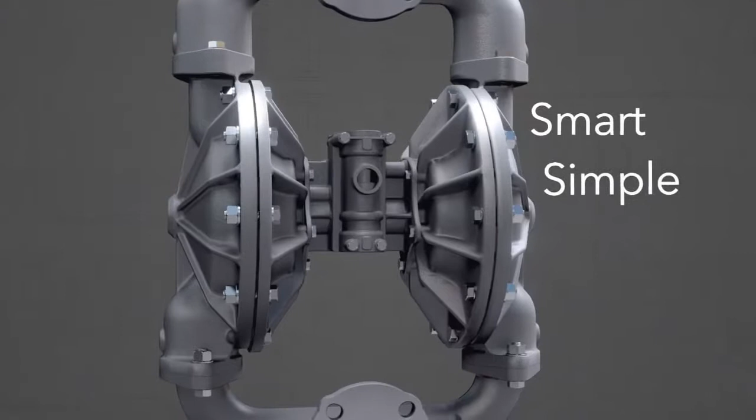Say hello to the All-Flo A200, the most energy-efficient 2-inch air-operated diaphragm pump in the world. With a smart, simple design perfected during years of intensive research, the A200 combines rugged reliability and ease of maintenance to deliver the best performance on the market today.

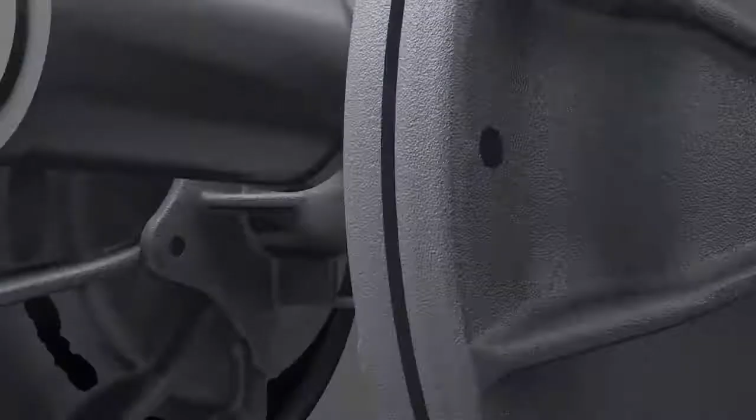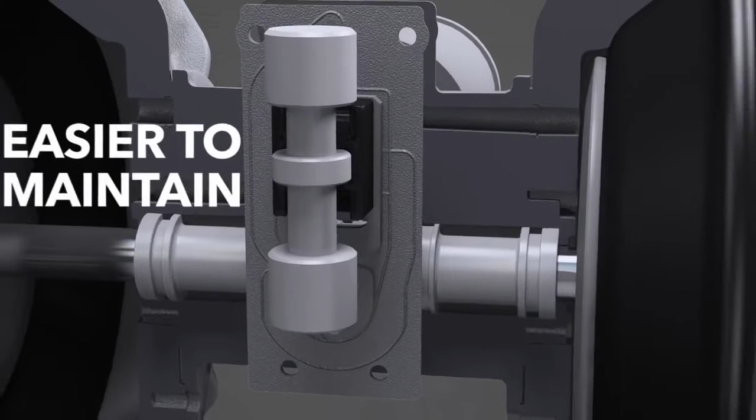The A200 is engineered to outperform the competition while using the fewest number of air valve parts in the industry. In fact, during operation, only 4 pieces of the air valve move. This makes the A200 easier to maintain, faster to fix if there's a problem, and less expensive to operate overall.

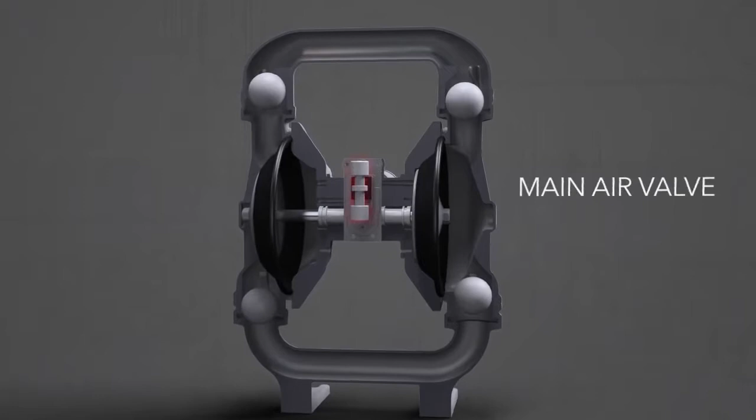Here's a look at what makes the A200 tick: check valves, diaphragms, the diaphragm rod assembly, the main air valve, and the pilot air valve. Now that you know the key components of the A200, we can discuss how it works.

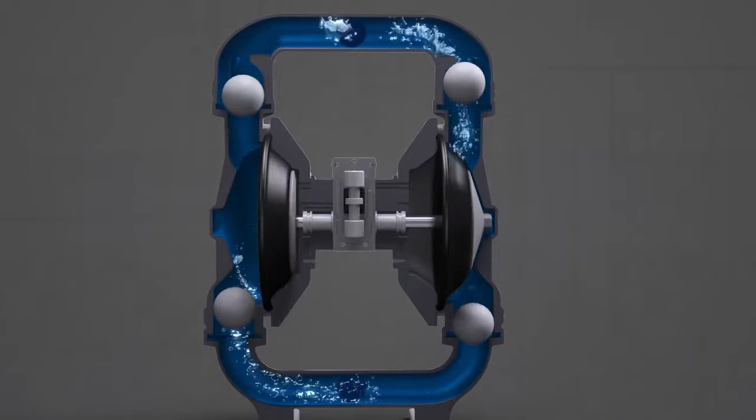2 diaphragms, connected by the diaphragm rod, work in unison to create the liquid motion of the pump. While one side is in suction mode, the other is in discharge mode. As a diaphragm moves inward, it creates suction, causing the balls to move towards each other. As this happens, the top valve closes and the bottom valve opens, allowing liquid to enter the chamber through the bottom port.

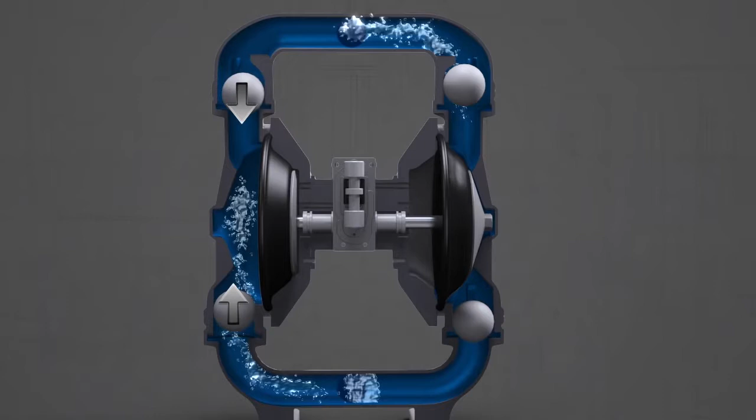As a diaphragm moves outward, the discharge motion causes the balls to move away from each other. As this happens, the top valve opens and the bottom valve closes, allowing liquid to exit the chambers and discharge through the top port. This process constantly alternates between the 2 chambers to create a continuous cycle.

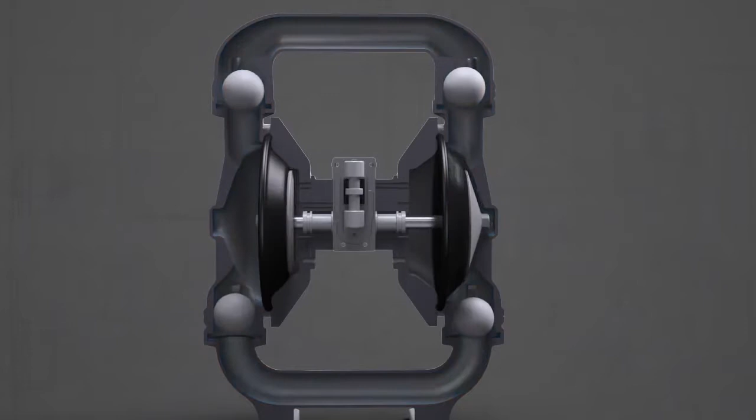The pump diaphragms are driven by pressurized air that is directed left and right by the movement of the main air valve. Here's how it works: when air pressure is applied to the pump, the main air valve moves up and down. When the main air valve is in the down position, air pressure is diverted to the right diaphragm.

At the same time, exhaust air from the left diaphragm passes through the shuttle and shuttle plate and exits the rear of the pump. When the main air valve is in the up position, air pressure is diverted to the left diaphragm, while the right diaphragm is exhausted. This process constantly alternates between the up and down position to create a continuous cycle.

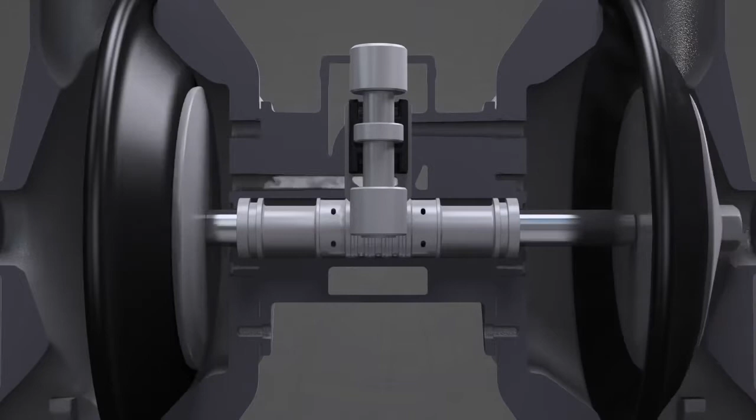The pilot air valve directs the air that moves the main air valve. It is constructed of 5 separate chambers and a central rod that moves side to side due to the diaphragm pressurizations.

The pilot and main air valves work together to drive the pump. The pilot air valve has 2 logical states, which we will call left and right. Pressurized air enters chamber 3 in the middle of the pilot valve sleeve. Chamber 3 is always under pressure.

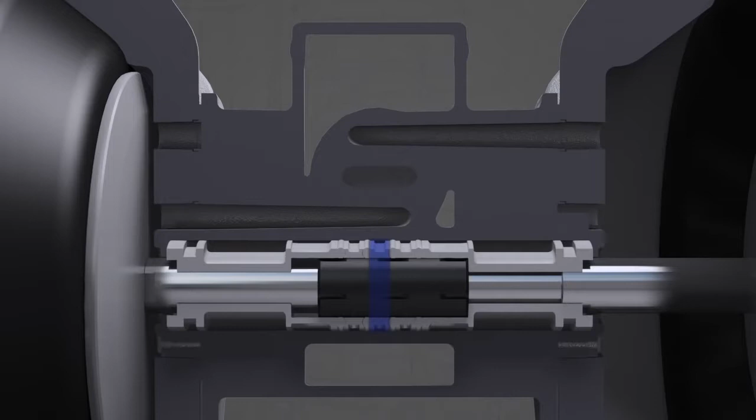When the pilot air valve travels far enough to the right, chambers 3 and 4 are connected. This allows the pressurized air from chamber 3 to pass through and exit chamber 4, which moves the main air valve upward. This causes the left diaphragm to pressurize and the pilot valve to begin moving left.

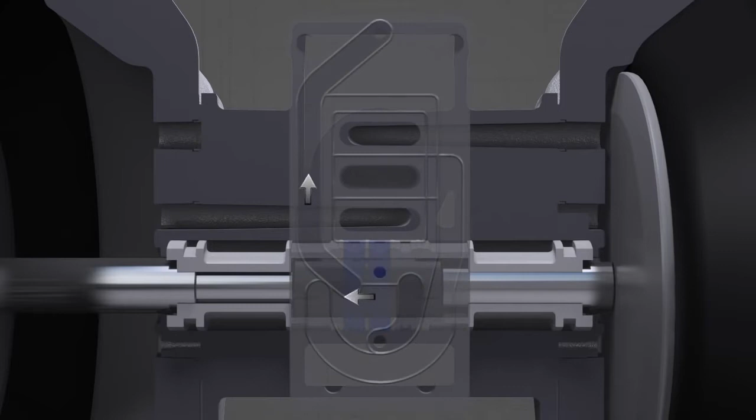When the pilot air valve travels far enough to the left, chamber 3 connects to chamber 2 and the air moves the main air valve downward. This causes the right diaphragm to pressurize and the pilot valve to begin moving right.

Throughout the cycle, one side pressurizes as the other exhausts. This process constantly alternates between the pilot and main air valve to create a continuous cycle.

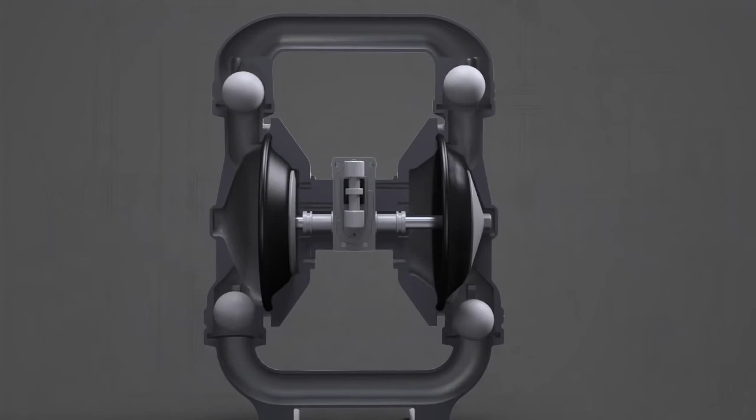The simple, straightforward design of the All-Flo A200 allows the air and liquid ends to work together reliably to transfer your process fluid in the most efficient manner possible.